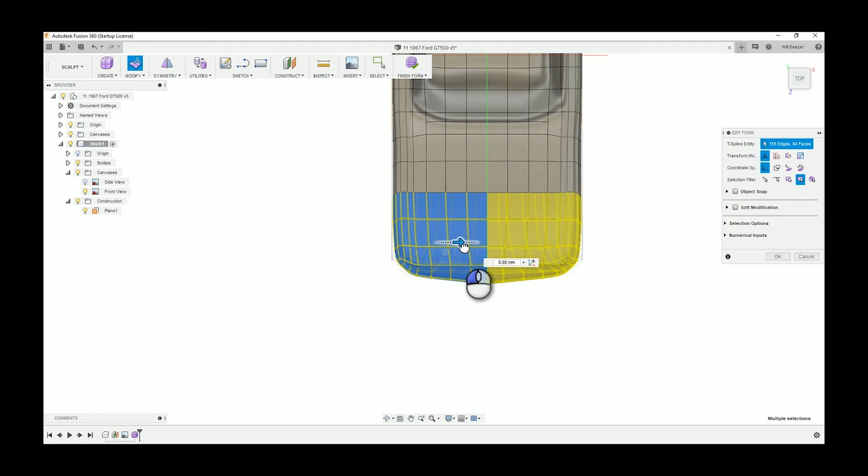Hello and welcome back to part 6 of modelling a Mustang in Fusion 360. We'll get straight into it.

So at the moment I'm just touching up the front of the car using selection boxes. Using selection boxes from the vertical view doesn't really create any problems when you're grabbing such large areas, but using it from the side view or the rear to front view will create you a lot of problems. So at this stage you should really only be using selection boxes when looking from a bird's eye perspective.

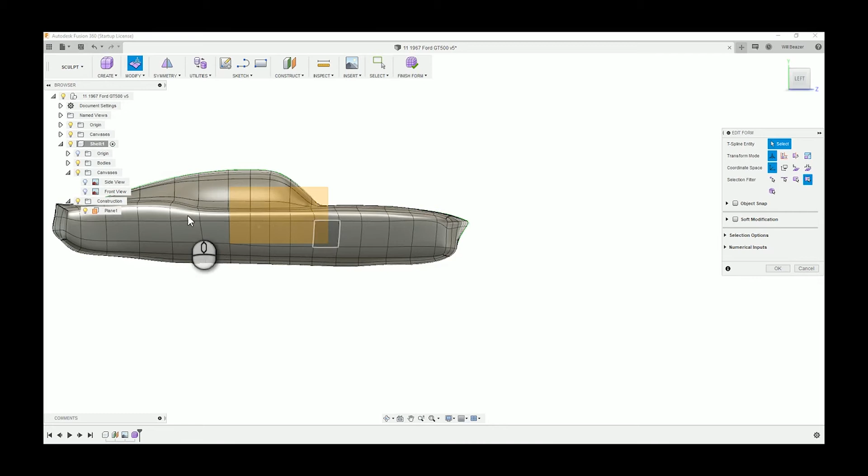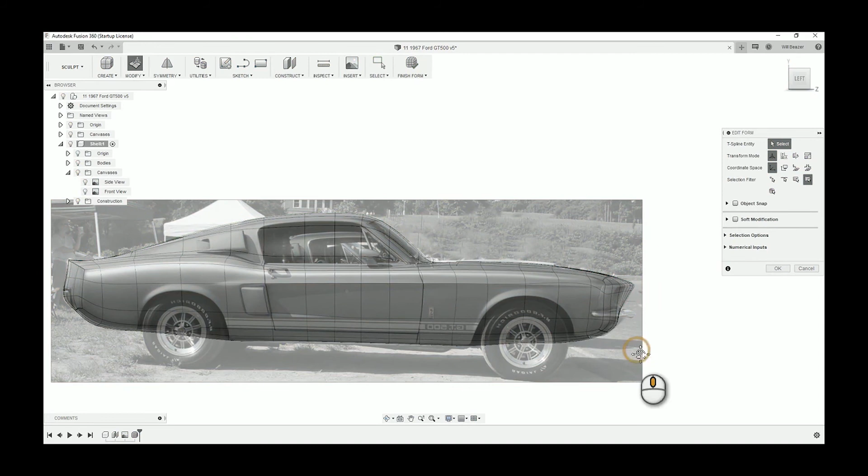So showing and hiding canvases can often expose a lot of problems. So what I'm doing here is I flash the canvas on and off, and I notice straight away at the front of the car there's something not quite right, and it becomes more obvious when you show and hide your canvas. If you remain in canvas view, sometimes you assume that the lines in the canvas are lines you've done because they are quite faint. So yeah, by turning it on and off, it does help show and expose any kind of problems you face.

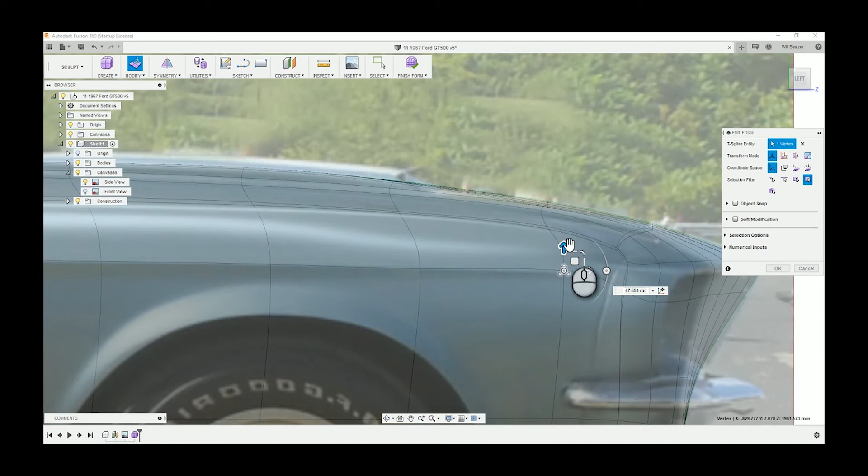So yeah, just touching that front bit up. Again, it's not at its final stage, but just getting those points in a more convenient place where the lines are a bit smoother and they flow a bit better. It's just always beneficial. You don't want to work on the front of the car to perfection, then work on the middle of the car. You want to gradually go back and forth over the car, adjusting it, because you're less likely to create yourself errors. I mean, it's more time consuming that way, but it just functions better.

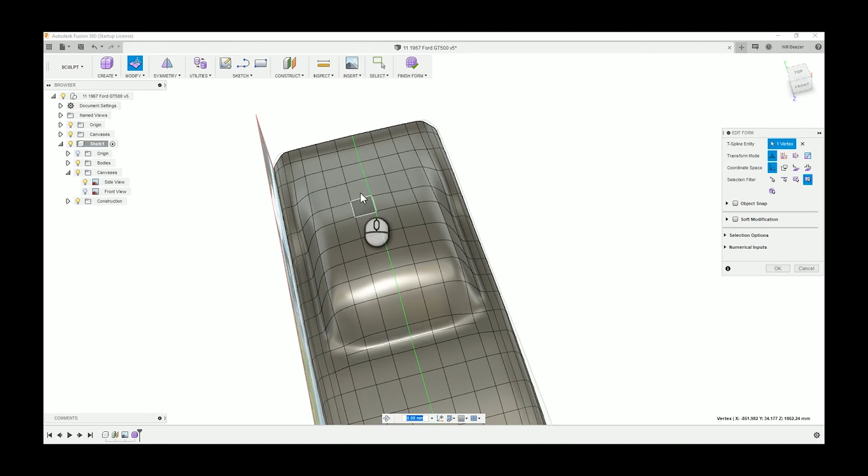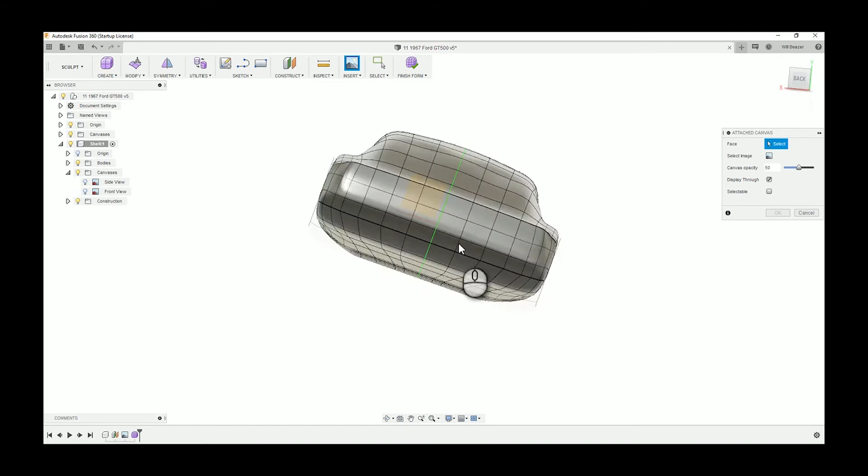So I'm attaching my third and final canvas into this model, which is the rear view. One thing I should say is you could have 4 canvases and do the top down view as well, and you would be more accurate with it. I've just never felt the need to. Usually I model cars that I've been obsessed with for ages, so I'm quite unlikely to get the curvature at the front and the rear wrong. But you can for added accuracy. To be honest, you could have an image to cover all 360 degrees along all 3 axes to model a car, and you'd nail it, but it would take you ages. So like I was saying, it's just a model that is as close as I can achieve in a day.

So yeah, rotating this model here just to make it as level as it can be. You could create a quick sketch and draw a horizontal line at a certain point on the car, and that would be a really good way of making sure it was dead horizontal, but using your eye you're usually fine. So there, briefly calibrating that image, so clicking the 2 widest points and setting that as the width of the car that we've already found out.

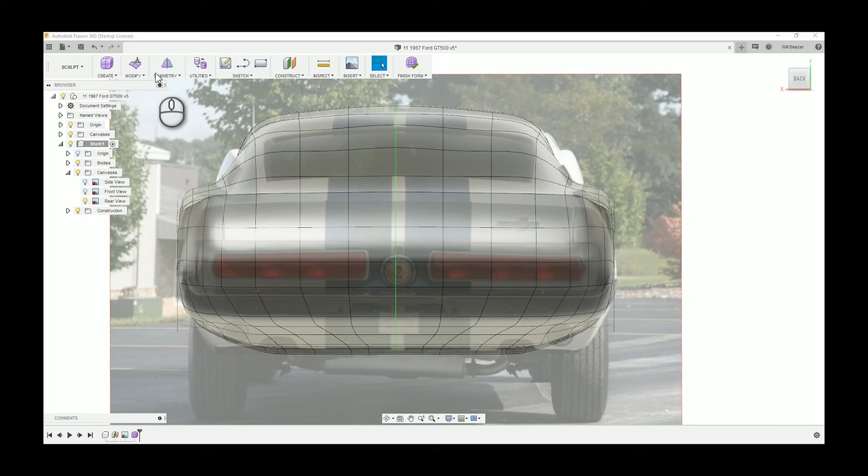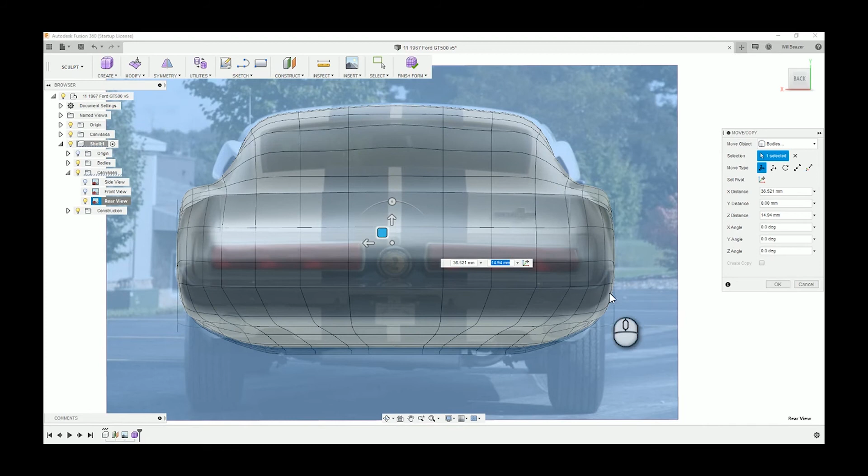And now what I want to do is just edit the canvas. So the spoiler in the image, well, the little lip at the back of the car, is lower, so I need to raise the image, and I also need to move it to the left a bit, because I know that line of symmetry, the green line that appears in the middle, should line up with the features of the car. It's actually just disappeared, but the line of symmetry was appearing. So there we go. That's got that image nice and set in a position that I'm happy with.

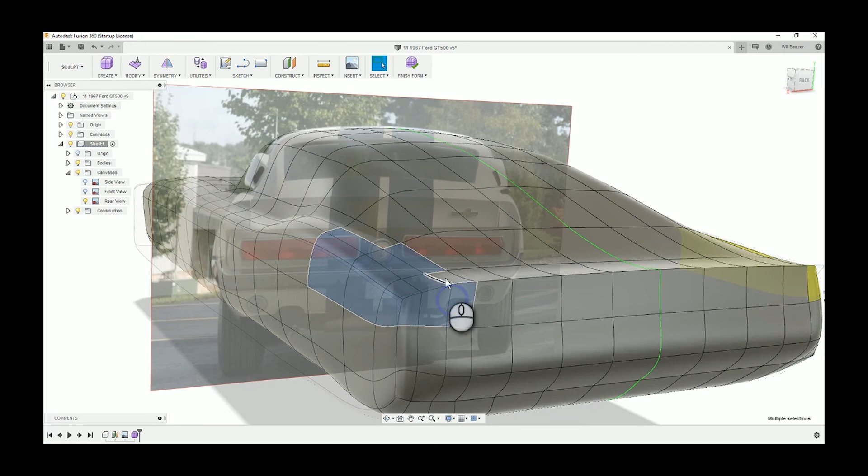So now starting to model those edges. Here I'm not using a selection box, I'm just shift clicking, and the reason is because if I was to draw a selection box where I'm doing it now, it would also affect the front right corner of the car, because remember, selection boxes select everything that lines up with your view in that area. So this would line up from this angle with the front of the car. So by clicking each box, or section, or panel, individually, I'm not going to interfere with any other geometry than the ones that are on the surface closest to me.

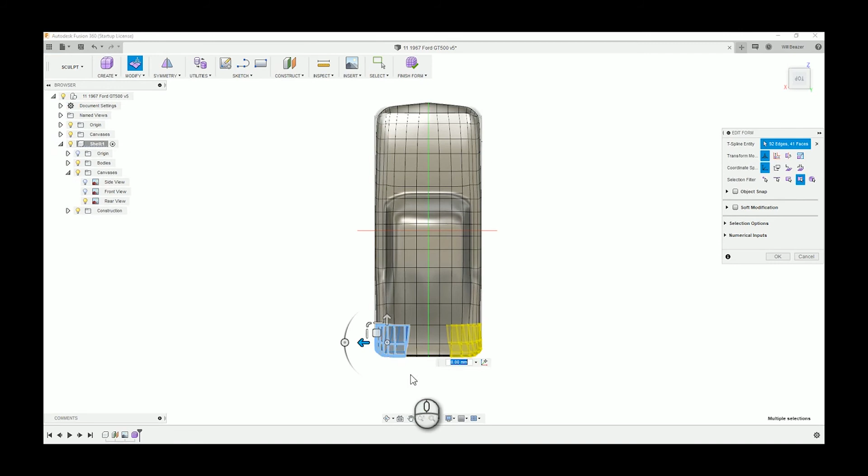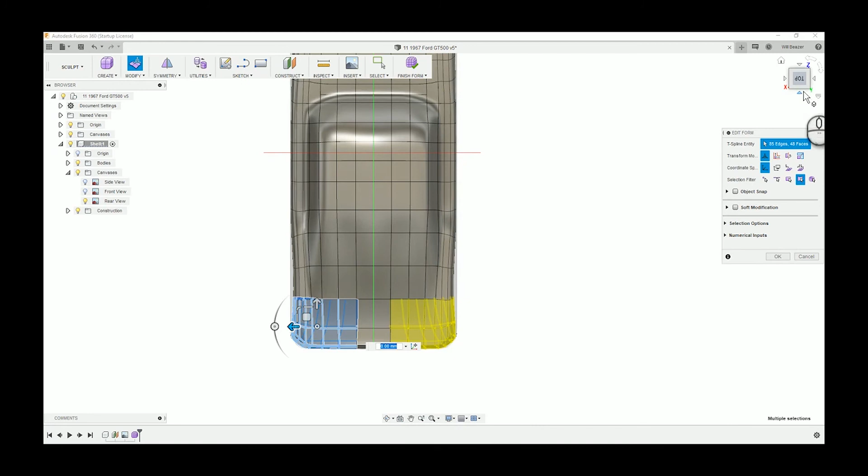So now, kind of just adjusting, using some selection boxes. So from a vertical point of view, it just doesn't affect it because I've drawn that from like a bird's eye view. I'm only affecting the rear of the car. I'm not affecting anything that's not symmetrical, if you get what I mean. So the car front to back is not symmetrical, or top to bottom is not symmetrical, but it's symmetrical side to side. So when you're looking at it from this vertical point, you're only affecting features that are symmetric anyway.

So you can still use selection boxes to draw from top down, but only on the edges. You wouldn't want to do it in the middle, like in the middle of the rear windscreen. You wouldn't want to draw a top down box, because then you'd affect something in the dead center of the bottom of the car, and you'd probably create yourself a problem.

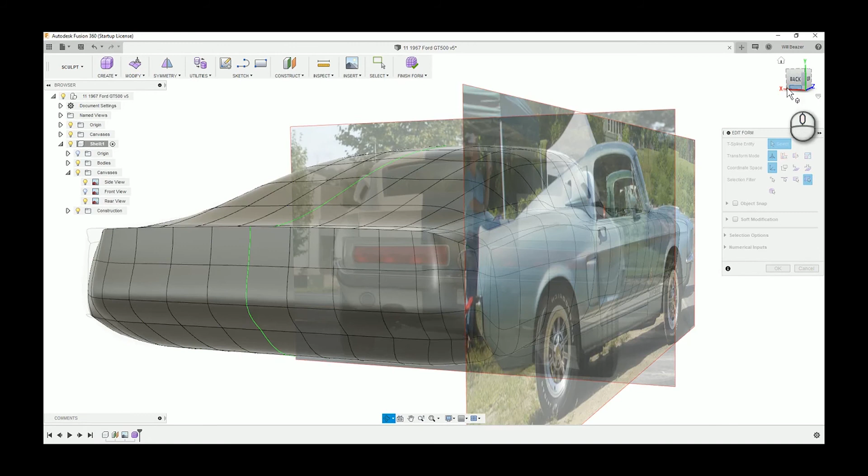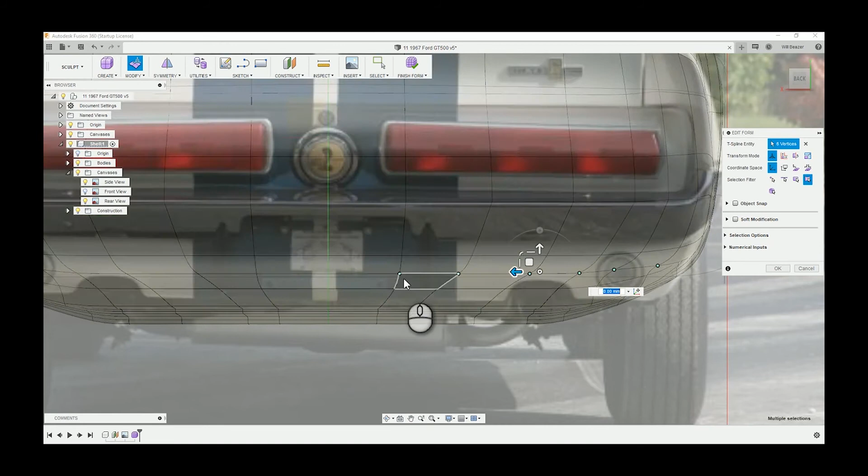One thing I haven't really mentioned at this stage is the importance of saving your work. So, hang on. I will get into saving your work, but briefly, I just want to say, here, these dots that I'm selecting should line up with the bottom of the white section of the car from this point of view. But from the side point of view, they're actually higher. And so what transpires in a second is that you have to decide which image is going to be your main reference.

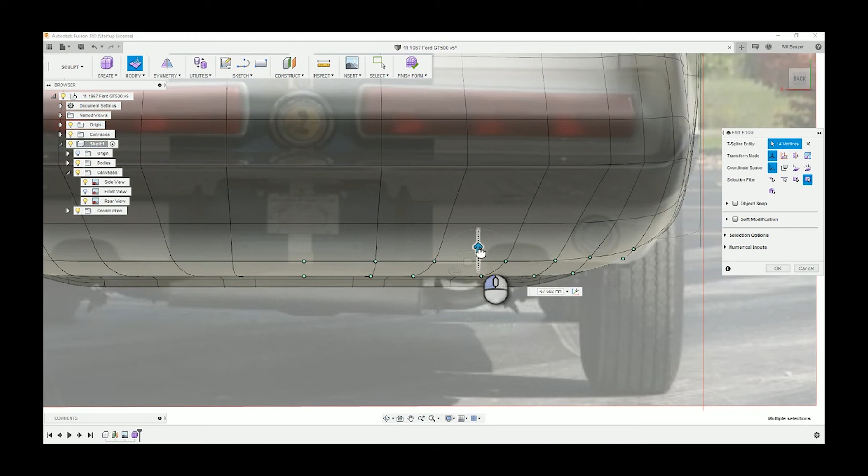So in parts where perhaps the images, just because of the lens they've been shot on, might have a greater perspective, you have to decide which image has hierarchy or priority. For me, it's usually always the side image. They're usually taken on a longer lens. There's many more images of whatever car you're trying to find from a side-on point of view than front to back. So I always let the side image dictate.

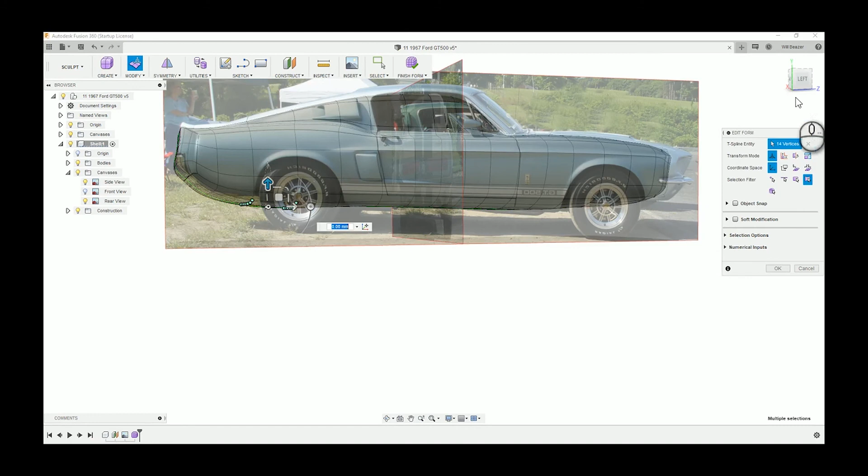See, it sits a bit low there. So see where the old line was. So now if I raise it back, there we go. And that's because for me the side image has hierarchy. So yeah, going back onto saving your work. Saving is extremely important.

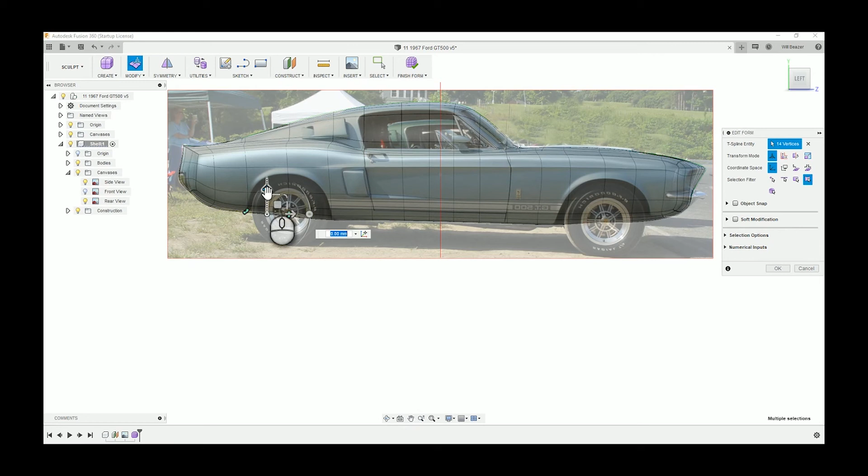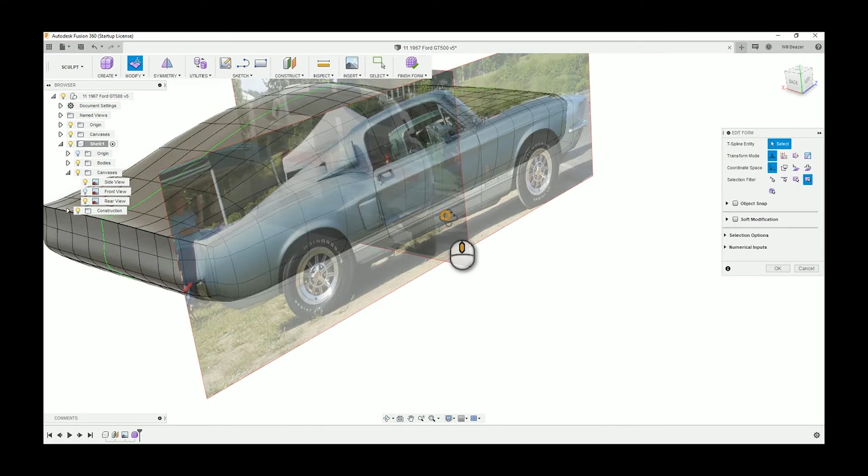In surface modeling, a lot of the time when you go to finish form, it'll probably give you an error saying there's some self-intersecting geometry, and no matter how smart you are about a model, no matter how many times you've done it, unless you're doing something really simple, it will probably come up. I don't get them so much anymore, but I'm fairly certain in the 9 cars that preceded this car, I always had something saying there's self-intersecting geometry, and then you have to go and fix it, and it is a nightmare. So by having regular saves, you don't cause yourself this problem at all.

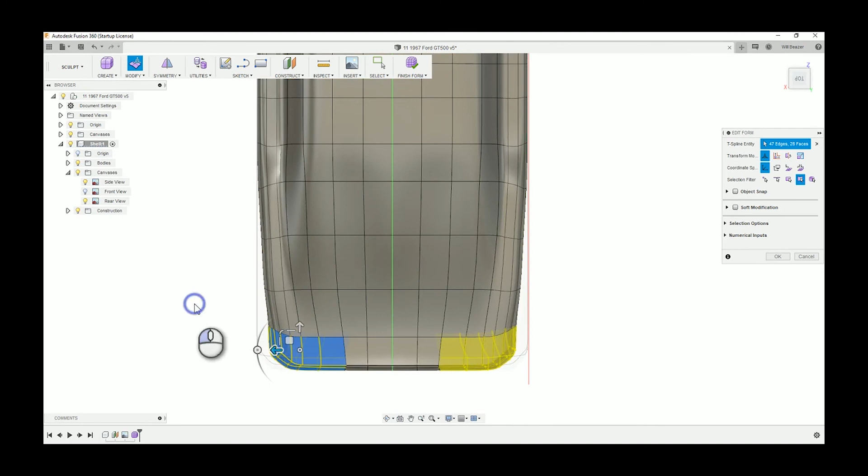Well, you still might get this problem, but then you can just go back to before the save and figure out what you've done to cause that issue. But yeah, regular saving, dead important. Right.

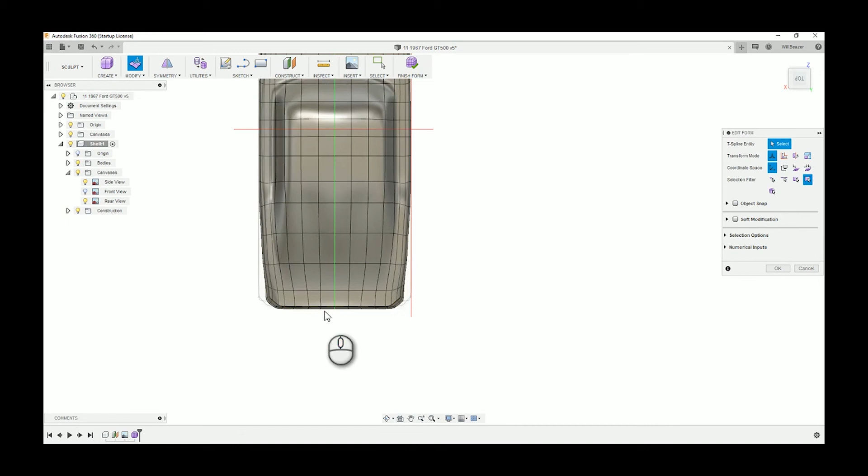So I'd also mention on the car, those lines that run up and down and side to side and all around, it's important that they have a nice flowing curve to them, that they're not zigzaggy, that everything flows well, because in almost all production cars, it's always nice smooth lines. So by creating smooth lines even just here, it assures that the model's going to be just a lot better. It's just a good indicator of when a model's going to be successful.

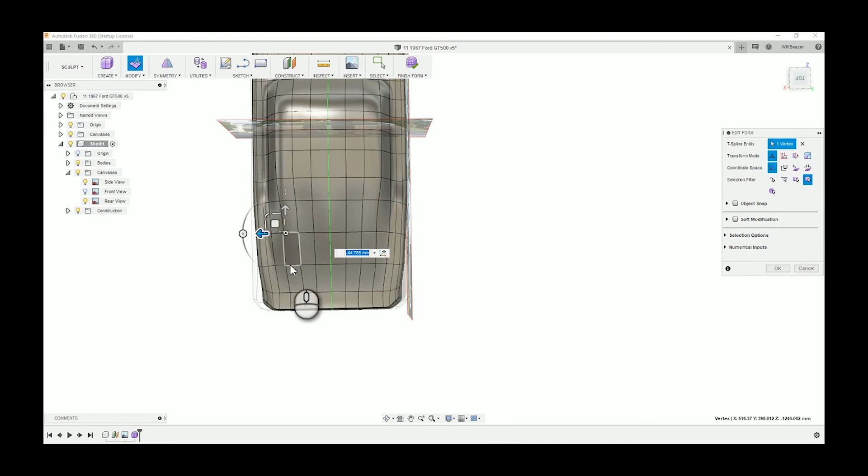So there, briefly, what I did was I used a selection box from the top-down view, and that actually selected the underside of the car, which I hadn't thought about, but I've only just noticed now watching this video. So, like I was saying, it doesn't matter too much that we're taking it from a top-down point of view, but the fact that I just didn't even notice I was doing it, that can be a dangerous habit that you don't want to keep.

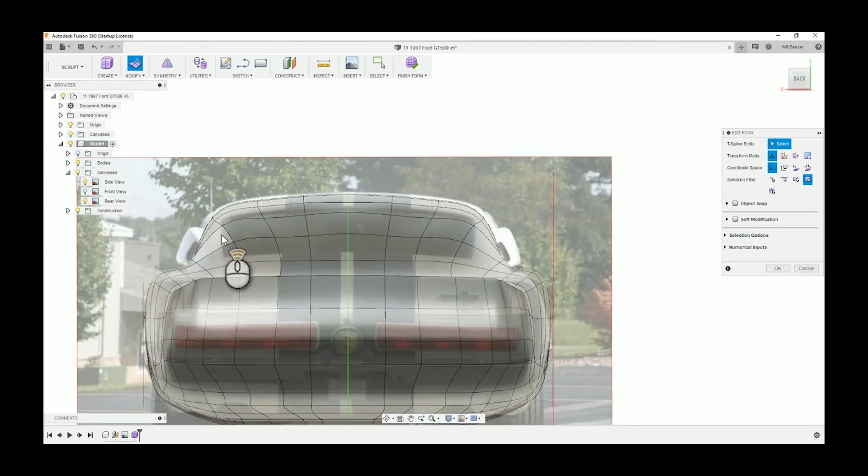So yeah, now just adjusting those sides. It's quite difficult to see. I mean, it's easier to see when you're full screen in Fusion, but I can see when I'm modelling at least that curve needs to be tighter.

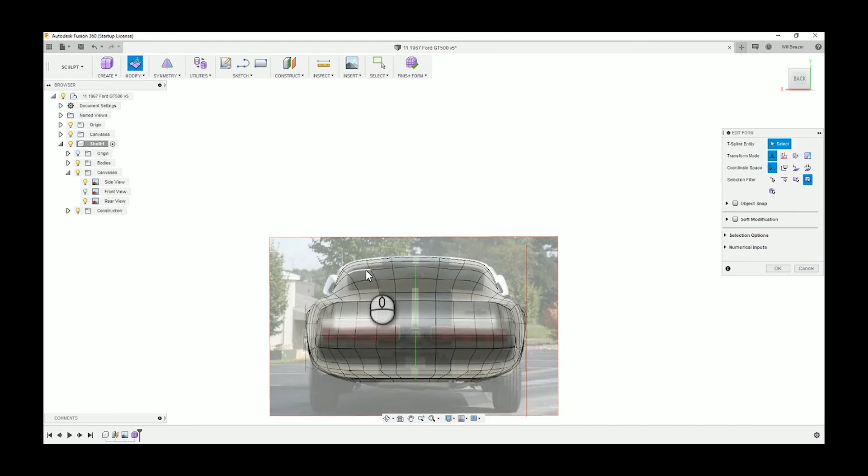So naturally, when you put in a canvas, I think they always come in at 50% opacity. You can crank that right up to 100, or you can put it to 0 if you wanted, but you wouldn't be able to see it. But maybe if you're struggling to see where the image is, just put the opacity up a bit, and that'll help you.

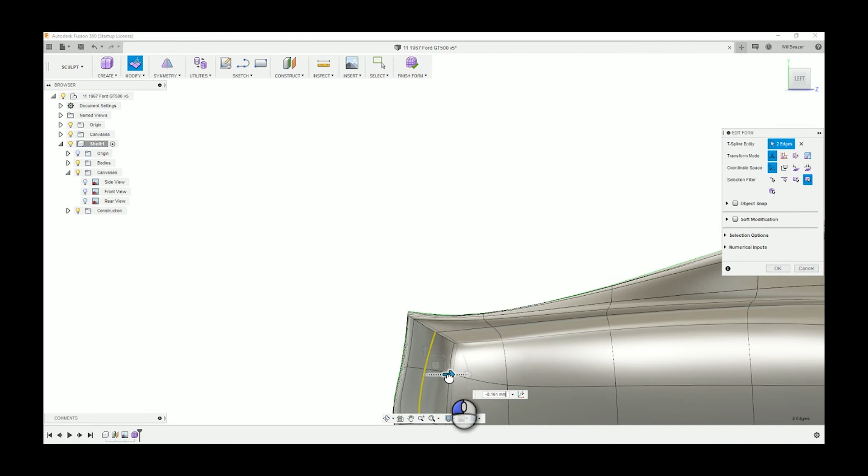Too high though, and then you start to not be able to see where your model is. Say if I was doing it from a side view, it might be difficult to make out those lines because they'll be darker, and so they'll be less likely to show. But yeah, just an idea.

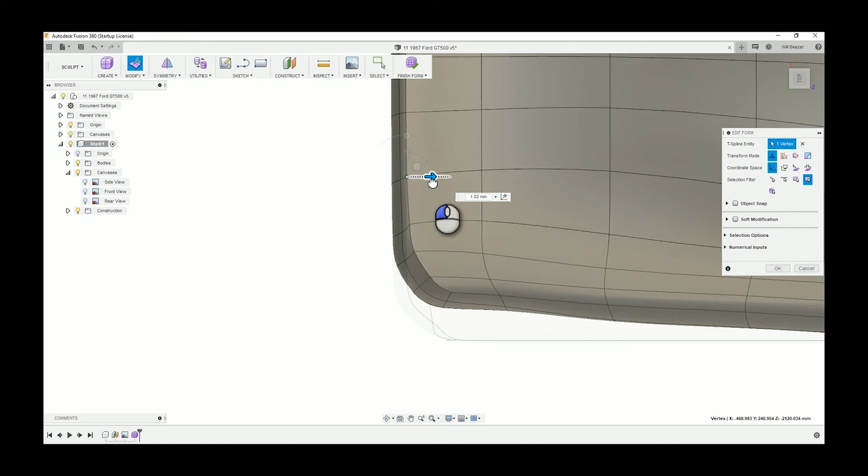So there, just trying to adjust that to a smoother curve. It was just quite angular. So yeah, just moving those points to create a little bit more of a natural curve, with a bit of tension in it.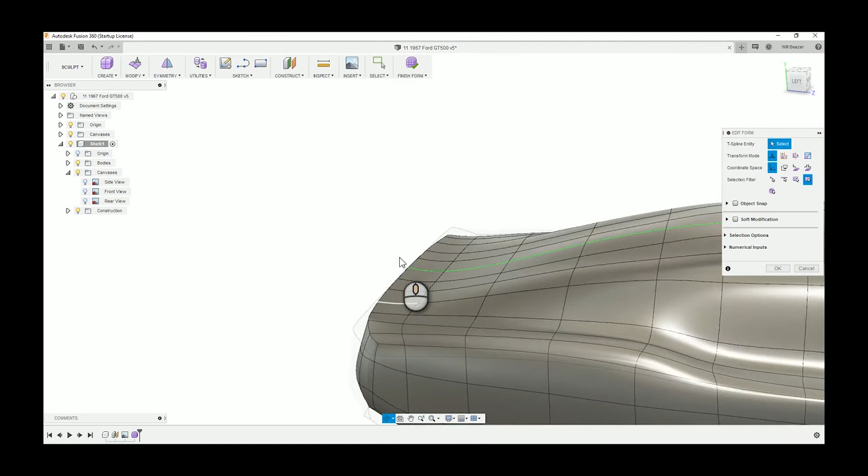So tension in curves is like, if you imagine a piece of string, and you pushed it together, it will coil up and it has no tension in it at all. But if you pull it fairly taut, like around your fingers or something, the curves between it, that creates tension in those curves, and that's what you're looking to do with the car.

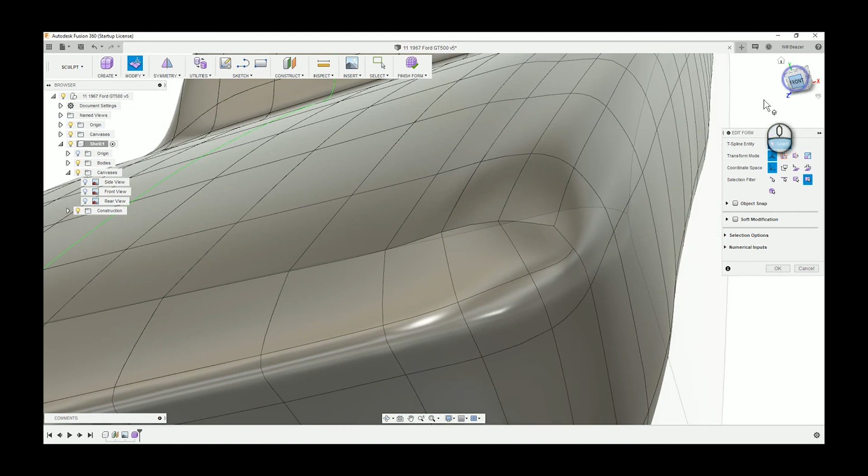So here, that looks a bit odd. Those lines are like that, and when you find self-intersecting geometry, it often looks a bit like that, a weird kind of line that doesn't look quite right. So try and fix it as early as possible.

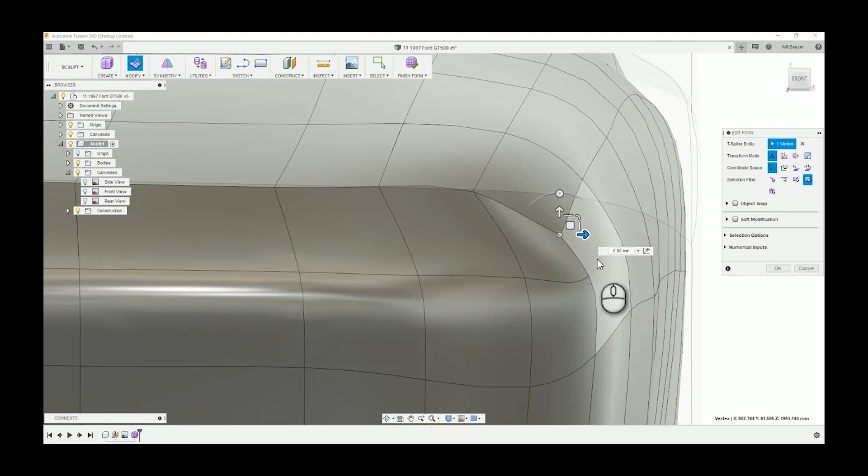And you can tell if self-intersecting geometry is in your model, because if you click Finish Form, you'll get an error that says there is self-intersecting geometry, and it usually highlights it in red. So you can easily see what's going wrong. The problem is fixing it is difficult. It's not impossible, but it's certainly difficult. I do know how to fix it depending on the case. Not all the time, but usually I'm fairly successful.

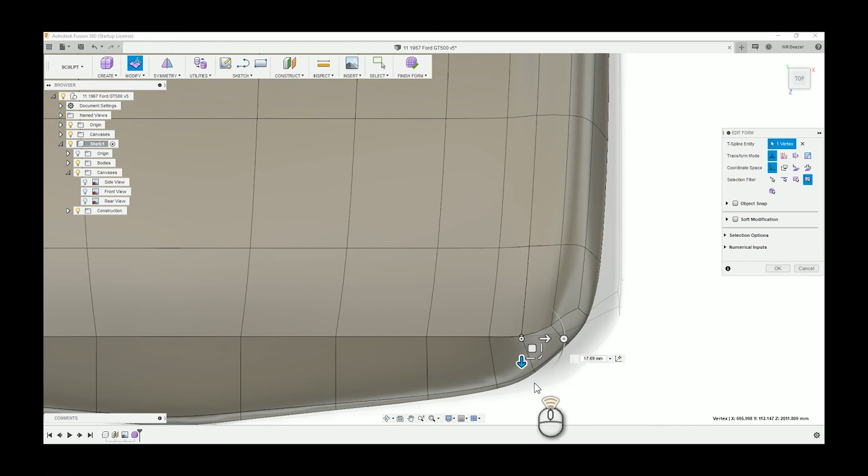Recently I was modelling a person's face. It's the first time I've done it. I've not seen anyone do it on Fusion before. It's difficult, but I found that it can be done in a day, but that did create a lot of self-intersecting geometry, and I spent at least 2 hours fixing geometry. So like I was saying, just create a lot of saves, and it's just easier to fix.

Right, so see that line on the side of the car in the actual canvas? That is kind of kicked out. It's not a natural curve. It's actually got a crease to it. So in Fusion, there's a tool called Crease. I select the lines that I want to crease, like you would a piece of paper when you pinch a fold. You go in the drop-down menu for Modify, click Crease. You've already selected the lines, and then all you have to do is click OK,

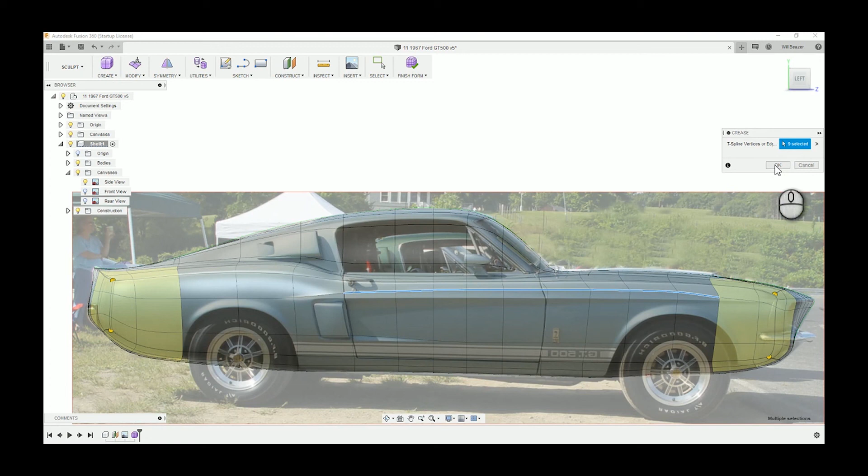and it changes that line that was once a gradual curve to, if you look from this angle, a lot sharper. See there? It's not a right angle, but it has a crease to it, and that's what we want, because it's subtle features like that, details, that really elevate your model. Without features like that, it just becomes a more generic looking model. So it's things like that that make it look a lot more accurate.

So yeah, now I'll just click on the points on that crease and modify it and drag it down. So again, starting to line up with the crease in the actual image. Elevate that, and that looks a lot better.

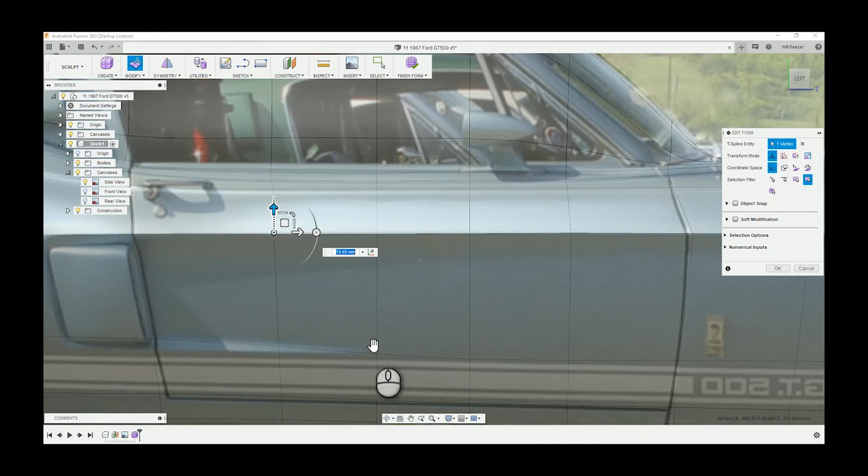So I think that's it for this video. In the next one, it'll be a lot more minor editing, but perhaps we'll get into the tires. Anyway, that's it.